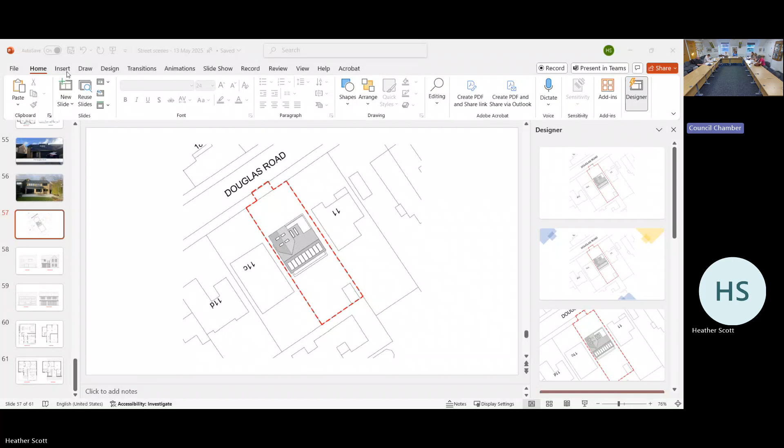So application 5/2025-0523 does not meet the criteria. So can we go to 5/2025-0524? Ashley Gardens. Okay, so this application is the complete resubmission of the approved application 5/22/1132, which has not been constructed. The proposal looks to demolish the existing detached single garage towards the rear of the property and build a wraparound style single storey extension with 800mm gap along the boundary with 34 Ashley Gardens and a 2-storey extension

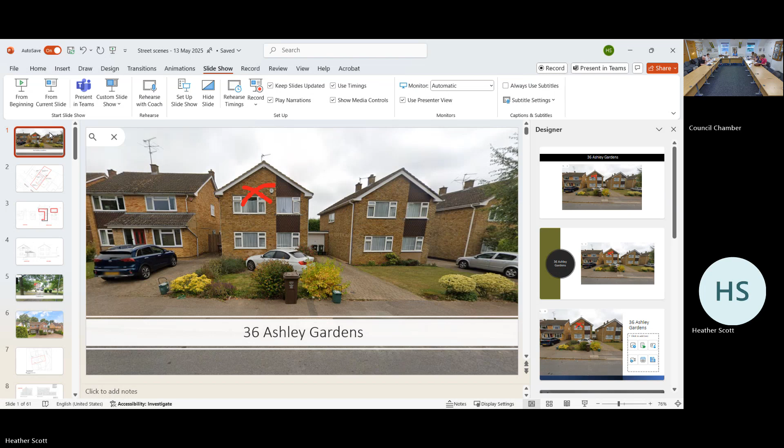to the rear across the width of the property to create expanded living space at ground floor level and the enlargement of 2 bedrooms at first floor level. No additional bedrooms are proposed. The 45 degree visibility zones have been shown on the drawings to not be interrupted. No tree work, parking provision on the frontage is retained, and I've said to consider no objections, subject to no loss of amenity to neighbouring properties. Policy 72 of the district plan refers. I'm happy with that. Yes. Yeah.

And the next one is 5/2025-0560, 7 Meadows. Okay, planning permission was granted in 2023 for a more detailed and ambitious scheme than what is proposed in this application. The approved application has not been constructed. This proposal looks to add a small 2-storey extension to the front to expand the lounge and add another bedroom at first floor level, which will be 4 bedrooms in total. The previous application looked to convert the existing garage into a store/gym, internal alterations, along with a single-storey rear extension, extension of the existing flat roof element at first floor level to expand the existing bedrooms and add en suites.

Properties in the street are set back from the highway with tree-lined driveways. Properties do not follow a uniform building line, with number 6 Meadows a good distance away, with a side double garage between the houses, which reduces the impact from the proposal. A tree survey has been conducted with no trees proposed for removal and recommendations given on how to protect the existing 8 individual and 1 group of trees during the proposed works. Site is not conservation area and there is ample parking on frontage. I said to consider no objection. Everyone happy with that? Yes.

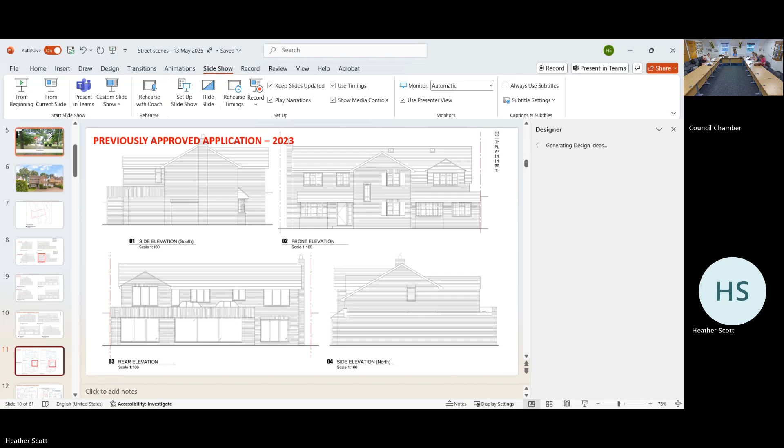One question, just to remind me, what's the ratio of bedrooms to car spaces? So in theory, anything from 4 up, there should be 3.5 spaces, or 2.5 spaces and 1 unallocated. So when we have a 4-bedroom house, we'd like to see a minimum of 3 parking spaces on the frontage. Clearly enough there then. In theory. So we use discretion because we know that the district council do not lean heavily on an application being refused due to parking. Everyone in agreement with Heather's? Yeah. Yes.

5/2025/0280 is not for us today, and then we'll move on to 5/2025/0245, which is 27 Barlings Road. Okay, so the proposal is to demolish this dated property and replace with a new two-storey dwelling with accommodation in the roof space. A Chartered Building Engineer report concluded that due to its age, poor insulation and evidence of structural degradation, this justified demolition. The spacious plot sits at the end of the road with the large gardens of properties in the Chowns to the side. The existing property is wide and shallow on the plot, whereas the new proposal is more square and sits more centrally, with greater distance to the boundaries. The 45-degree visibility zone for number 29 Barlings Road has been shown to not be impeded, despite the rearward projection being greater than currently.

There is no increase in ridge height for the new property from the existing of 8.4 metres, and it has a hipped roof to both sides. The road follows no distinctive style or pattern, with many different sized properties and roof forms.

Forward of the dwelling building line, a detached double garage with a games room in the roof space is proposed, along with ample parking provision on the frontage. There are trees around the edge of the site, but none are to be removed, and mitigation measures to prevent damage are to be put in place. Not a conservation area.

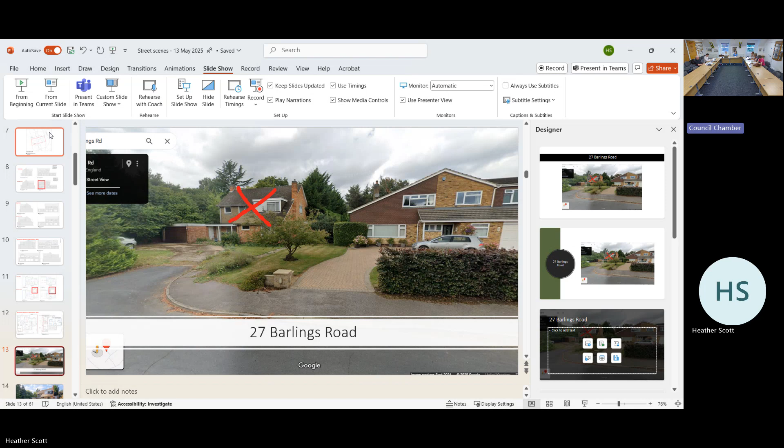So those were the main objections and concerns that were shared. To summarise, it's oversized, it's in the wrong position, it's too far back. They've got a problem with the windows and the gates.

I agree with the gates. I mean, I actually went around to look at the property the other day. Yeah, so it's all very much very 1970s and open. I'd also question, is that a ransom strip? Is that a Jarvis ransom strip? Have they got any restrictions on there as well next to it, which they often do?

What's that? What kind of green strip? There's a green strip there. Well, Jarvis, what they do is they put ransom strips along the side of the land, and I've actually fallen foul of this and had to pay Jarvis a fee, even though they no longer have anything to do with my house. So I've had to pay a fee in order to erect a garden building, for example. Right. Okay, so that could be. There's no mention within the application papers of anything to do with that. So in theory, it's not a planning matter. Yeah. It's obviously something that is.

But the gates, I would definitely agree with what they're saying on the gates, because has it got precedent? Can we say anything about the gates though? Yes, we can. To be honest, the gates were literally mentioned as one line. They aren't in any of the street scenes or anything at all. So I didn't even pick up on the black gates because there is one line which is mentioned under the materials that are going to be used across the site. So I didn't even pick that up until I was like, well, where have these black gates come from? They're not in any of the pictures. So yes, I probably would have felt exactly the same due to looking on the street scene of the openness of it.

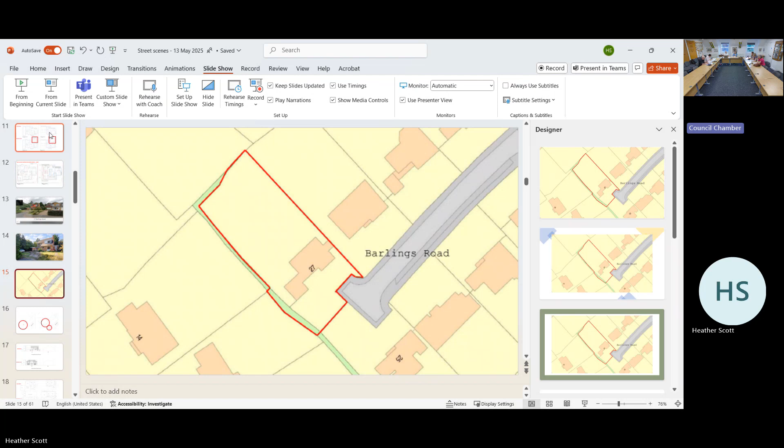Can I just ask a question? Yes, of course. With respect to the proposed aerial view, there appears to be the second red circle. What is that? That is the proposed double garage. Okay, so that's separate? It is, yeah. In these objections, they seem to mention that it's being built further forward than the building line. But when you look at the drawings, the block plan, it doesn't appear that it is. I thought they said it was going too far back. They said both. Okay. But again, it's not breaking any rules. It's not in the 45-degree. I mean, there is lots of space at the front of the house itself.

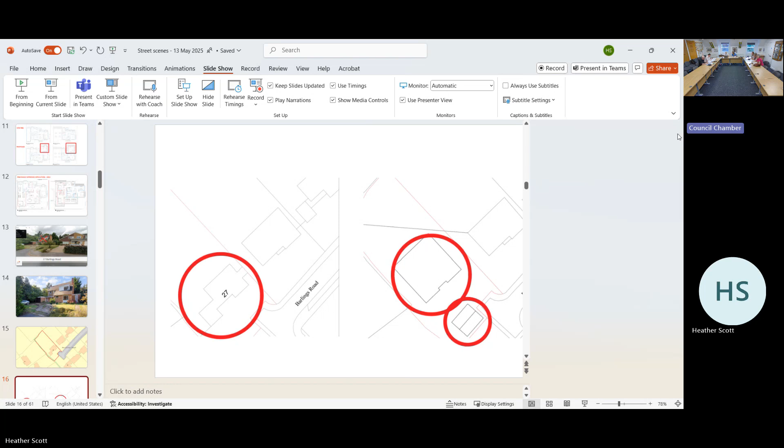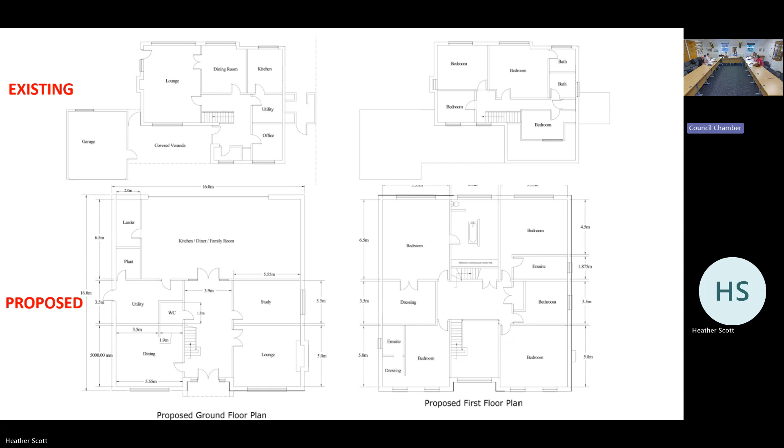Also, there are other buildings of that size on that close. And it wouldn't be impeding on anyone if they even brought it forward slightly. The gates I agree with, but there is another house, I'm not sure if it's on Barlings or the Chowns, that have got big gates. Yeah, because I did look round Barlings Road and there are other ones that do have gates. But I think these objections are coming on the basis of their cul-de-sac. Yeah, and I would probably agree with that. The thing is, it's set so far back, it's all very windy to get in there, so I wouldn't even say it's more of a security issue, because you don't happen upon it, it's hidden away. It's a cul-de-sac, you'd have to go round all of those roads, you'd probably get lost on the way out.

On the circle one, Heather. It does look like they're going quite a lot further back into the garden, but the front line has moved back as well. Because at the moment, the one on the left, the front line is quite a bit further forward to the one next door, and they've stepped it back. The bit at the left, is that in line? So that's a little bit further forward. And I wonder if they're taking that line and bringing that line across, so they're technically not going any further forward.

I don't know whether they're making reference to the double garage as being built in front of the building line. Yeah, it must be. That's the thing I was thinking they could be referring to, because the actual dwelling itself does not appear to be built in front. They've moved it back. If you look at the line and how it sits with the next door house, it's marginally further back.

It's further back, yeah. It's actually quite substantially further back, isn't it? Yeah, because it has increased the floor space quite considerably. So I don't think it's the front. I can't see the front is the concern. It's what's the effect on the neighbours of the much heavier footprint going backwards.

But there's no effect on the light, you've said, because the 45-degree angles are all right. And the height was about the same. Yeah, the height isn't changing, but I think it's the sort of feeling of dominance, I think. Because although the height is not increasing, the actual roof form will be.

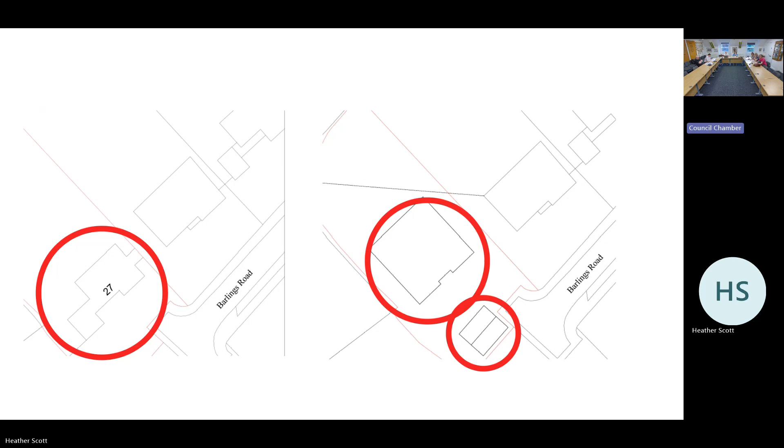Yeah. And I do take on board some of the resident concerns, particularly with respect to the gate, but I don't think the suggestion that this doesn't have benefits for the wider street bears weight. And just looking at this, there seem to be other houses of that size on that street. Yeah.

And although the left side is going into the trees, isn't it? It's not bearing over a next door neighbour, it's going to the bottom of gardens. This would be like the first properly done modern house on that road. And actually, when I went around and looked at it, I thought it's got a nice property there to develop. But I can imagine there's going to be a massive impact building a house of that size on that little cul-de-sac as well.

But against that, the house has deteriorated. They're going to have building work, whatever, aren't they? Yeah. Because that house ain't compatible with going forward. No. And I think the materials involved in it are out of date, and technically we need to look at the eco side of it ultimately.

So we've started with no objection, but then we've obviously had neighbour objections. Has that shifted anyone's perspective? And if so, what to? Gates? Can I just ask a quick question? Sorry to backtrack. What's the precedent on demanding frosted windows on the side of somebody's house with respect to gardens? So, you can request them if they are in what is classed as a habitable room.

So frosted windows is usually only something that you'll request at first floor level. I think sometimes objectors, possibly one of the reasons here, may be objecting at ground floor windows, but it's generally accepted that there'll be some form of screening between neighbouring properties. So yes, you can request frosting on bedroom windows, but generally developers don't put bedroom windows on the side. In this application, all of the side windows are for bathrooms, which will mean they will be non-opening below a certain height.

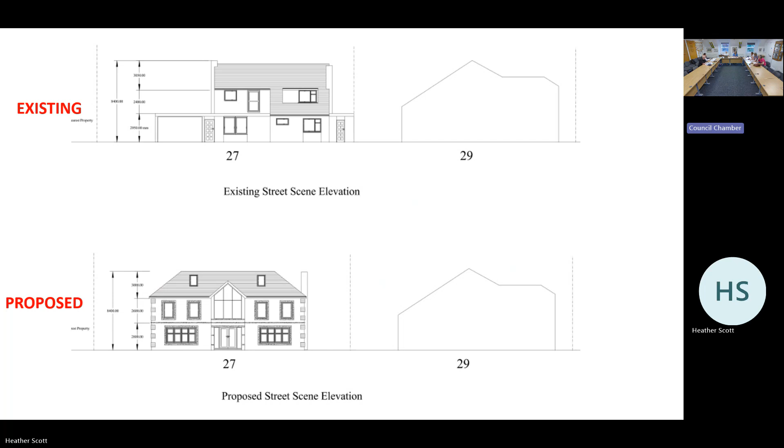Let me just have a little look very quickly, just so that we're clear. I'd say we've got no problem with the house, but we want to mention again we're concerned about the gates. Expressing concern that there isn't sufficient clarity about the proposed perimeter. But if we don't know, how do the neighbours know? They don't know either, they've just seen one line at the bottom of the application.

I'm just going to try and find the wording. So it comes under the section called design strategy, where they're listing the materials proposed. We've got the driveway, the patio, gates, black metal, 1.8 meters high, and brickwork gate piers, 1.8 meters high, bricks to match the house. That is the only reference. Nothing on width or position, so it's very vague.

Who's the architect on there, just out of curiosity? The last building he did was a prison.

But there isn't anything on there that clarifies it exactly. Normally you'd expect to see it in the street scene. Have you done a search through the documents for gates? Yeah, that's literally the only one in the document.

So 5/2025/0292 and 0574 are not for this committee.

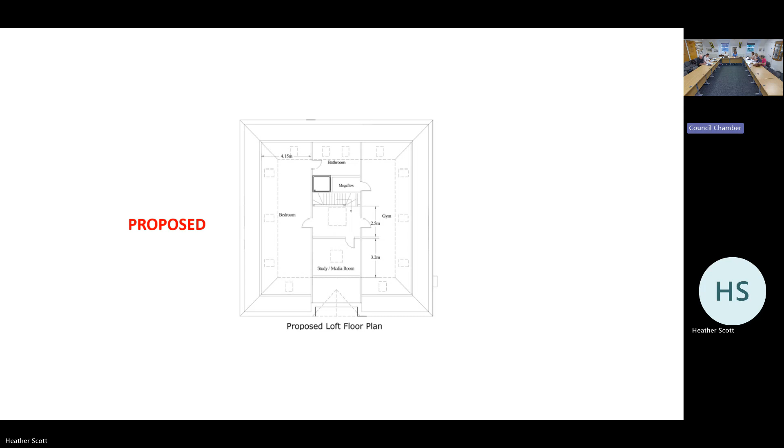Neither is 0108, 0608, 0781 and 0386. So we are now on to 50 Roundwood Park, which is 0617. Okay, planning permission was granted for a replacement dwelling in the site. However, its design, scale and bulk bear no resemblance to what is proposed in this application.

This proposal is to add a small single-storey extension to the front of the garage to enable the garage to be enlarged to 5 metres in depth, possibly to be used to park a car, and a 4 metre by 6.5 metre ground floor rear extension to expand existing living accommodation. At first floor, it's proposed to extend over the existing ground floor elements that currently do not have a first floor element to expand existing bedrooms and add 2 bathrooms. There are no additional bedrooms added to the existing 5.

The roof form of the current property is cat slide to both sides, with the proposal changing to a more uniform hipped roof form, which other properties in the street have, although there is no distinctive style or character in the street. Property has the access to Howe Field on the left and a good gap to 48A Roundwood Park to the other side, though this property building line sits further back on the plot and the 45-degree visibility zone is taken into account. There is parking for 3 cars off street in addition to the garage, not conservation area and no tree works. And I said consider no objection.

And there's nothing. No. Happy with that? Yeah.

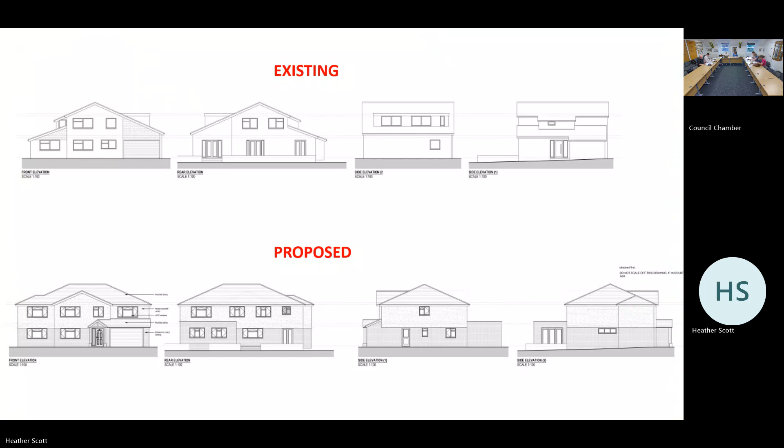So let's move on to 5/2025/0607 and it's 10 Park Rise Close. The property is currently a bungalow with a gable roof and side dormer window, which provides 2 bedrooms in the roof space. Further 2 bedrooms are provided at ground floor level. The proposal is at ground floor level, looking to extend the overall footprint of the property by extending across the footprint and beyond the existing garden room and side along the existing driveway to provide open plan living accommodation.

A single detached garage which sits beyond the rear building line is to be demolished as part of the proposal, with a small shed put in its place. The rear ground floor projection does not extend beyond that of the neighbour's rear building line. The first floor is proposed to extend almost across the full width and depth of the proposed rear ground floor extension, again to the front, with a step in to either side to limit the impact on the neighbouring properties. The first floor extension provides space for 4 bedrooms, same as the existing property.

The 45-degree visibility zone for the lounge at 12 Park Rise Close has been drawn on the plans. However, it's not clear that this will not be impacted from the proposed first floor extension. The plans seem to depict that the frontage is to be re-landscaped, providing space for 3 cars off street. There are no tree works proposed and it is not conservation area. I've said consider no objections, subject to no loss of amenity to neighbouring properties from the first floor front extension. Policy ESD of the neighbourhood plan and policy 69 and 70 of the district plan refers. Anyone got any questions or happy with the recommendation?

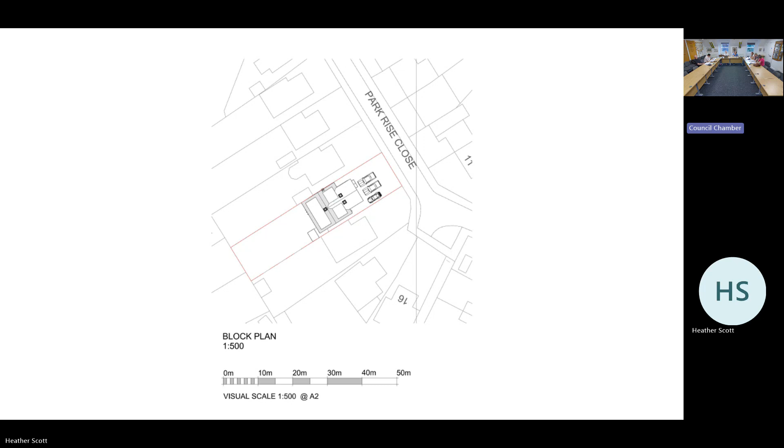Right. Okay. Yeah, I'm happy with it. I think it'll look a lot better. Yeah. It looks tiny there, doesn't it? Does it? Yeah. It's like a little shoebox. Yeah. I mean, when you look at it there, it's going to be basically the same. It's more habitable. And they've got similar houses that have been extended the same way. Number 6. It's identical to number 6, yeah. Okay. Happy with that? Yeah.

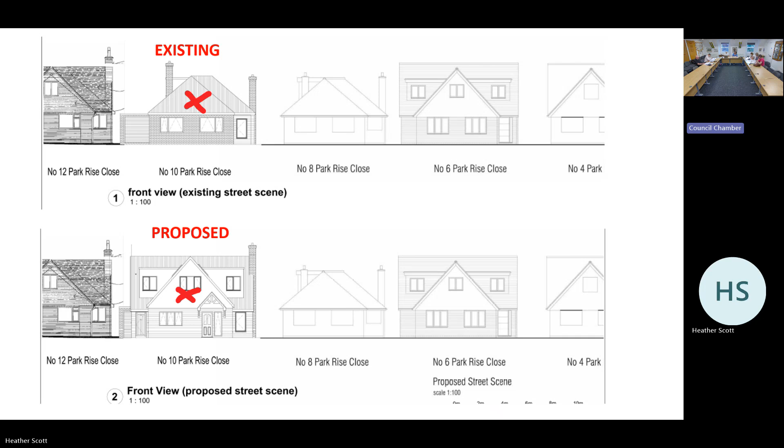5/2025/0591 and that's 1 Ox Lane. Okay, to the left-hand side of the plot is the garages and access drive for the apartments Lee Court, and to the right side, number 3 is set further back on the plot. Proposal is looking to add a small 2-storey extension to the front to expand the existing garage, which is to become a playroom, and an existing bedroom at first floor. This extension creates a uniform appearance to the frontage. To the rear, a partial ground floor and 2-storey extension is proposed. The ground floor element extends 6 metres rearwards beyond the existing rear building line on one side and 3.6 metres to the other, which extends beyond the existing utility room.

At first floor level, a 4.5 metre extension partially over the ground floor extension is proposed to the side of the Lee Court to extend an existing bedroom. There are no additional bedrooms added. Due to the position on the plot of number 3 Ox Lane and Lee Court apartments located a distance away, proposals do not appear to cause any detrimental impact on the neighbouring properties. There is parking on the frontage for 3 cars, not conservation area, and no tree works are proposed. To consider no objection.

That front extension is not going to impact the blue house to the right? I think it's stepping forward. No, because they have drawn in the 45-degree visibility zone. That's that dotted red line. Yeah. It doesn't affect that window then there. Where they've drawn the line, it looks like it's coming across to the middle, the second window in.

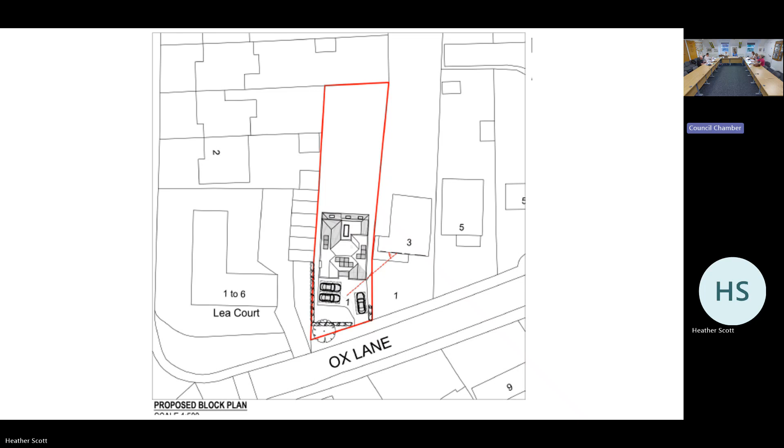Okay. Everyone happy with that? Yes. So we move on to 5/2025/0591, and 0782 and 0142 are not for this committee. So we now move on to 5/2025/0522, which is 19 West Common.

Property sits on a spacious plot with properties either side also sat on good sized plots with a number of trees and landscape screening. The proposal is quite substantial in terms of the additional footprint and accommodation that is to be added. At ground floor, side and rear wraparound extensions proposed, adding various additional rooms and changing the overall look and elevations. A forward projecting double garage is to be retained within the proposal, with the doors moved from side to front accessible.

At first floor, the bulk of the extensions are over the garage, with a small centrally located forward projecting extension to create a craft area and another centrally located rear extension to expand an existing bedroom. There are no additional bedrooms added, just expanding and adding dressing rooms and en suites. It is part of the conservation area, but not locally listed, and there are no tree works. Despite the proposals being relatively large, they are not overly dominant and are in keeping with the style and character of the host dwelling and other properties in the vicinity.

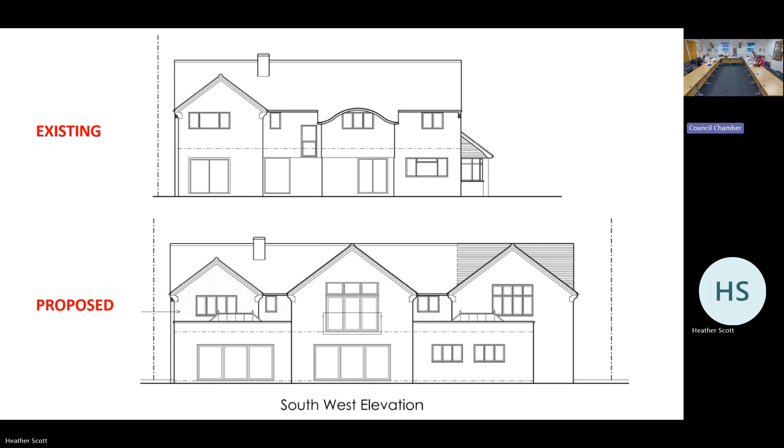I've said consider no objections, subject to the design being deemed acceptable on this property, which is located in the Harpenden Conservation Area. Policy ESD2 of the neighbourhood plan and policy 69, 72 and 85 of the district plan of affairs. Any questions? No? Everyone happy? Thank you. So we're going to 5/2025/0475, which is 4 Orchard Avenue.

The existing property is a moderate sized detached property with a double garage to the side and good space down the boundaries to either side. The proposal is looking to extend to 2-storey level over most of the footprint of the existing garage, retaining a 1 metre gap down the boundary of number 6. Single-storey flat roof rear extension to create spacious open plan living accommodation. There's 2-storey extension over the footprint of the existing ground floor rear elements and the redesign of the front bay windows to present as box bay windows. The roof design is also changing from gable to hipped, although there is no increase in the ridge height.

Number 6 appears to have 2 Velux windows in the side roof pitch, which could be impacted from the proposed 2-storey side extension. Proposals increase the number of bedrooms from 4 to 5. Despite the loss of garage, there is parking provision on the frontage for at least 3 cars. There are no tree works and it's not conservation area. And I've said consider no objections, subject to no loss of amenity to 6 Orchard Avenue. Policy ESD2 of the neighbourhood plan and policy 72 of the district plan of affairs.

It hasn't lodged any objection? No, not that were online today. Looks like overall it's going to be slimmer as well, the garage coming down at the bottom of the ground floor. So I think the footprint is going to be, but they're obviously adding more bulk. Bulk, yeah. Anyone got any concerns?

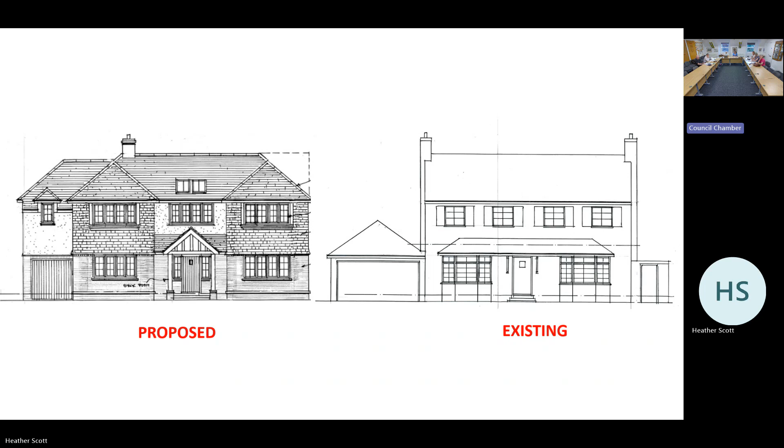Into the steps. Okay. Last one, 5/2025/0568, 11B Douglas Road. Okay, proposals are to make the footprint more uniform in shape by filling in the gap to the side of the entrance hallway at ground floor level to create a single garage, along with a minimally projecting at ground floor level two-story extension across the front to extend the reception room and to extend an existing bedroom at first floor.

Due to the existing sloping roof line, the extension does present a large addition to the frontage, although it does not extend beyond the front building line of 11C Douglas Road. The existing internal garage is to be lost to create a reception room, although an internal single garage is proposed as part of the scheme. An infill ground floor extension is also proposed to the rear across the full width to create open plan living accommodation. There are no first floor extensions proposed to the rear.

There is ample parking provision on the frontage. Property is in the conservation area but is not locally listed and there are no tree works. They consider no objections subject to no neighbouring properties and the design of materials deemed as being acceptable in the Harpenden Conservation Area. Policy ESD2 of the neighbourhood plan and policy 69, 72 and 85 of the district plan. Any online comments? No. On agreement? Yeah. Yeah, fine.

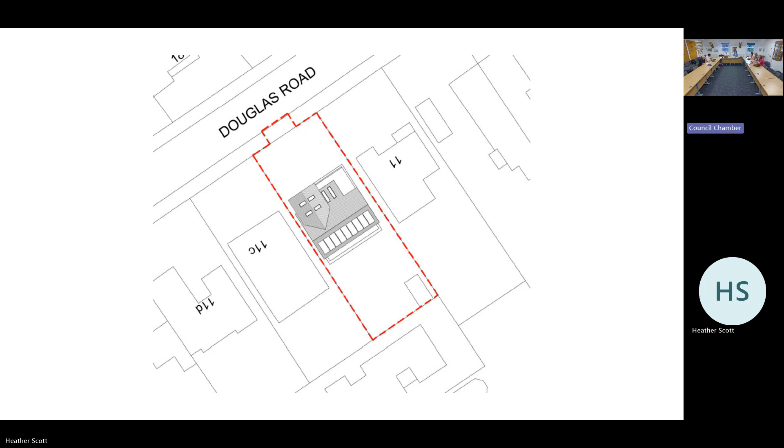But there is no invite in the diary, just as a note for you. There's normally an invite in the diary, so you could join online if you're stuck. But there's no invites in the diary, because I don't think Jane has sent them out. She probably hasn't, because we've just changed everything. Right, if you join online though, does that count towards our numbers? No. You're more than welcome to join and participate, but in terms of numbers we can't count you, because in theory you can't actually vote.

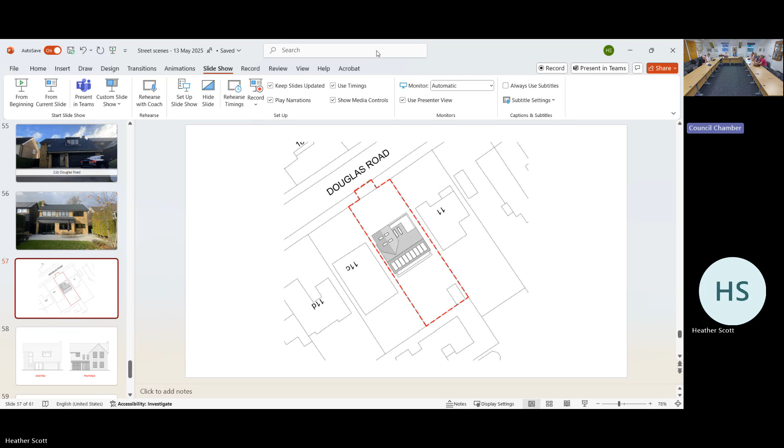Okay, right, meeting closed at 8:11. Anything else from anyone? One question, just for my edification. Are you still producing reports for this committee, looking at whether the LPA matches or doesn't match our comments? We did that at one point. I do still do it. Every quarter, is it?